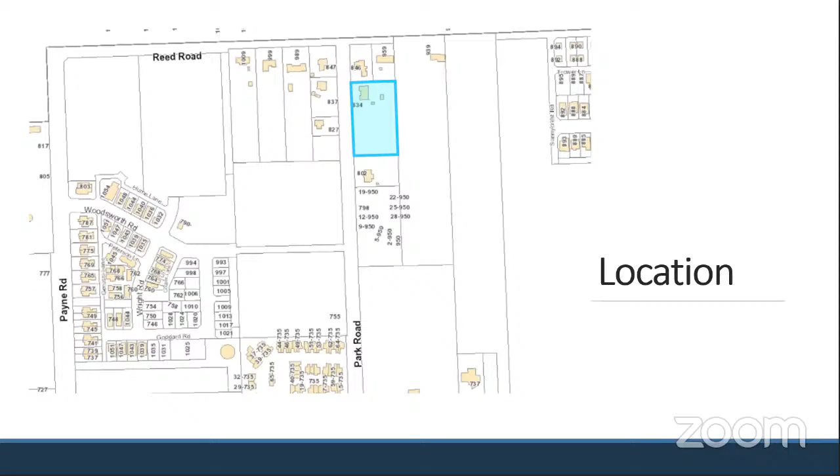A similarly sized property just to the south on Park Road, for context, is currently also under development with 28 units and using the same requested cluster residential zoning. So the application requires a change of zoning for the property from single family residential R3 to a cluster residential zone that's in line with the land use envisioned in the OCP, and also a development permit application for the form and character of the proposal, which is under intensive residential development permit area number 8. We're looking for a recommendation today on both the next steps of the zoning amendment and the form and character development permit.

Councillor D'Andrade, you and Councillor Kroll had a meeting with BC Hydro today, and Councillor Kroll and I had one with the RCMP earlier today as well. And Mark sat in on that, along with Nicholas Simons was in the background. Yeah, so it was good.

And we'll of course brief council at the appropriate time on those meetings and results, but it was a good conversation. I plan to attend that policing one and then realize that it was the same time as back to school start today. That's right, exactly. Yeah, so you went to school instead? I went to school instead, yeah. That's good. Councillor D'Andrade, your lips are moving, but I'm not hearing anything.

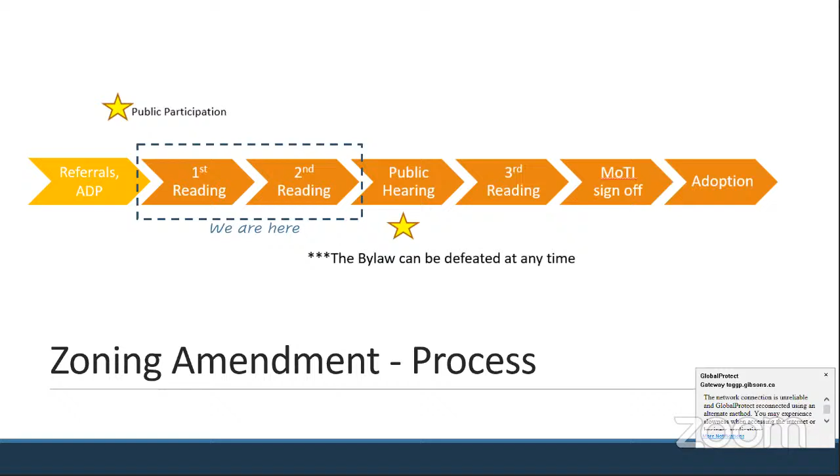The process for the form and character development permit, by contrast, is shorter. We've referred the application to agencies as well as the ADP for comment, and these are included in the report. Some revisions have been made preemptively in response to the ADP's comments, which will be shared with council for a decision following the public hearing on the zoning amendment. So today we're just looking for preliminary comments, with a decision to follow the public hearing.

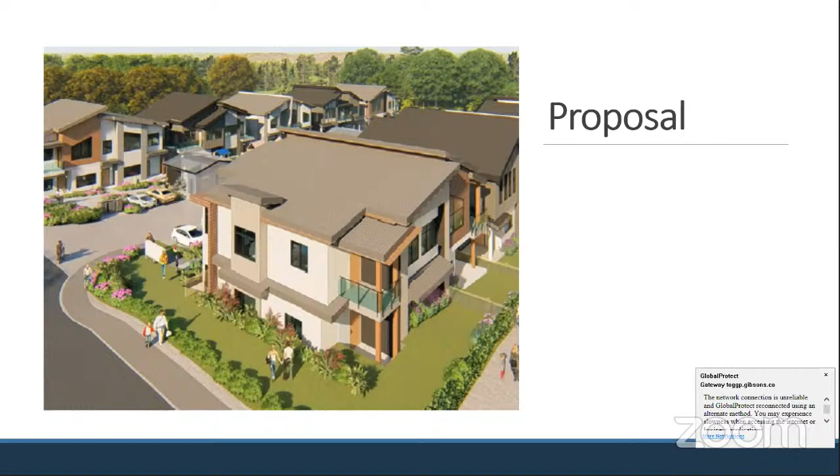As described in the plans attached to the report, the proposal is for 28 ground-oriented units within 10 buildings. 8 of the buildings have 3 units and 2 are duplexes, and unit sizes range from 1 to 3 bedrooms.

A change of zone is to be consistent with the vision for the property as described in the OCP. Like much of the properties within the Upper Gibsons neighborhood plan, the OCP designates 834 Park Road for development under the land use designation of low density residential 2. The intent of this designation is to permit small lot single detached dwellings, duplexes, cluster housing, townhouses, and multi-unit housing in a single detached building form, with an FSR of 0.75 to a maximum FSR of 0.9, generally 25 to 40 units per hectare.

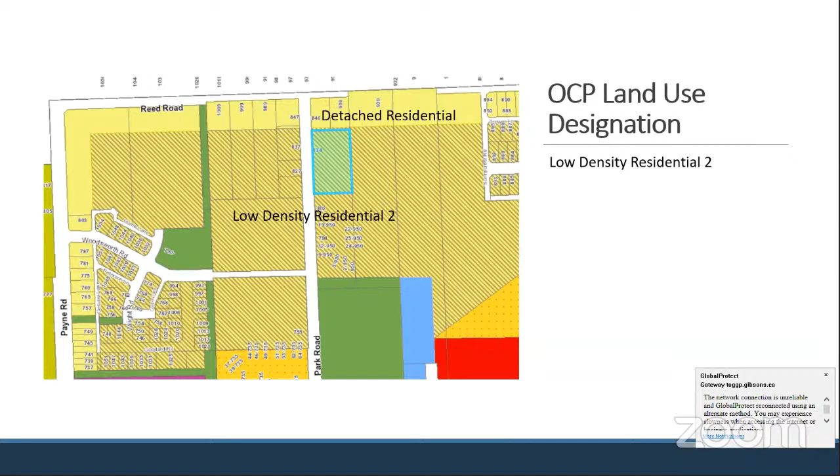The intent for land use in the Upper Gibsons neighborhood plan area is further described in policy 9.2.4, with the intent to encourage a range of ground-oriented housing types, including small lot single detached houses, semi-detached houses, duplexes, cluster housing, townhouses, fee simple row housing, multi-unit development in a single detached form, and garden suites.

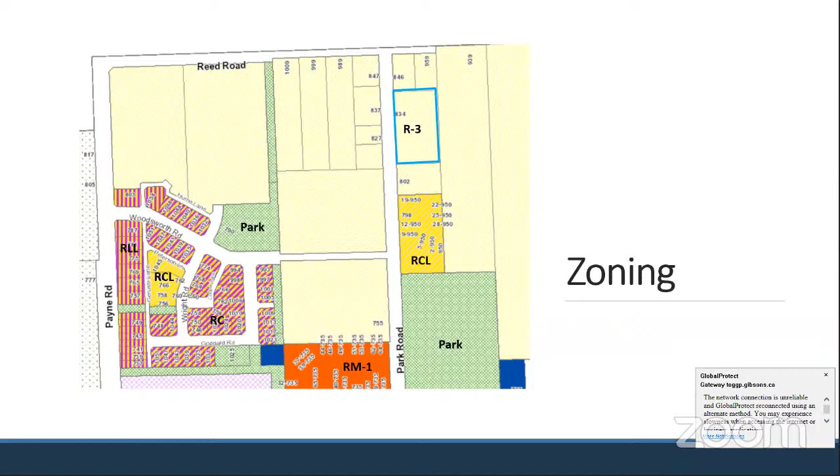The current zoning of the property and surrounding properties is single family and 2-family residential 3. The proposed zoning amendment would change the zoning from single family R3 to the RCL cluster zone, which was designed for use in the Upper Gibsons neighborhood area and has previously been applied in Parkland and on the property to the south on Park Road.

In line with the intent of the OCP's low density residential 2 land use designation, the allowed uses would be expanded to include duplexes, apartments, and townhouses, in addition to the single family residential use already permitted. It is the intent of the designation that the dwellings have a form that fits well within a single detached residential neighborhood context.

As discussed in the report, the zoning amendment includes a recommendation to remove the requirement that the upper story of the buildings have a net floor area of no more than 80% of the lower floor area. The intent of this regulation was to limit upper story massing. However, in practice it's shown to be problematic to implement, and it's also redundant given its intent overlaps with the form and character guidelines.

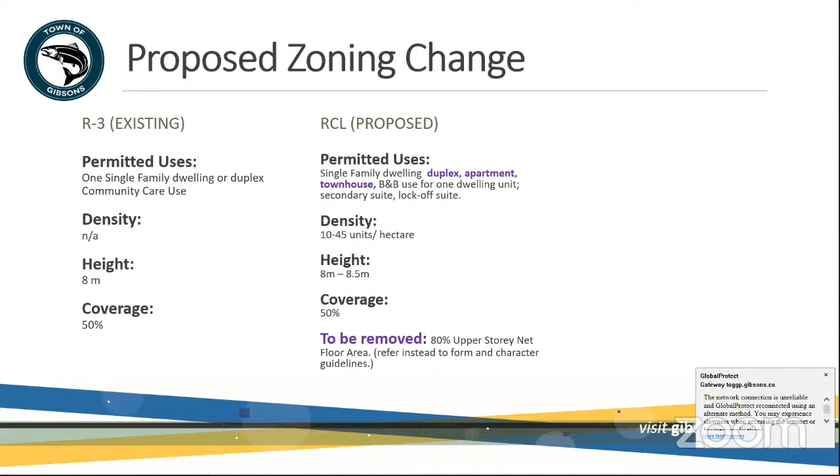As part of a zoning amendment application that increases the density for the property, the applicant has provided a letter outlining proposed community amenity contribution. The letter is attached to the report and proposes a cash contribution calculated based on the terms of the town's most recent draft CAC policy.

This was provided to the applicants as the best guidance we could offer at this point. The offer includes a provision of $112,000 with credit for the existing use permitted on the lot, and with further credit to be valued for the contribution of a public trail easement, provided in kind at the south end of the property.

Meanwhile, the applicant is also looking into the potential of securing affordable housing units through a partnership with BC Housing, and so intends that should an in-kind contribution of affordable housing units be feasible, the offer would be adjusted through a future request to council.

The total value of the contribution, presumably to council - I guess the mechanisms need to be worked out - is to be finalized prior to the adoption of the bylaw amendment.

The plans attached to this report were reviewed by staff and have been shared with the advisory design panel for comment in relation to the development permit area guidelines.

Following the report, in response to the panel's comments, the applicants have revised the plan in some minor ways to include pedestrian connections from the units to Park Road and to show more detailed renderings of the garages on the lane. The images I will share here are the revised renderings.

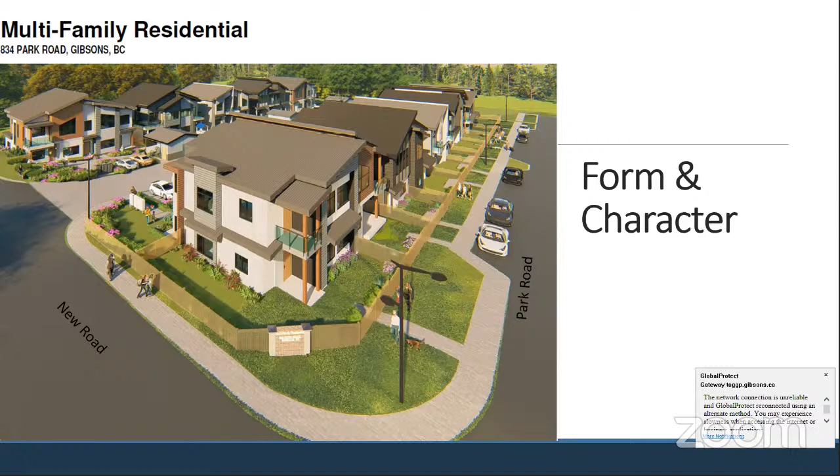The units vary in their designs with 5 floor plans repeated once each in the development and adapted to the location of each dwelling on the property. The massing of each cluster is broken visually with variation in roof lines and the use of architectural and finishing details. Front entrances are oriented to the central lane,

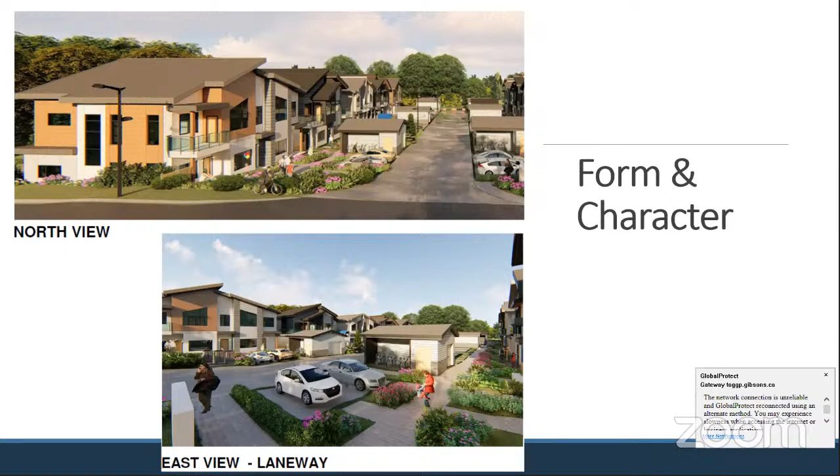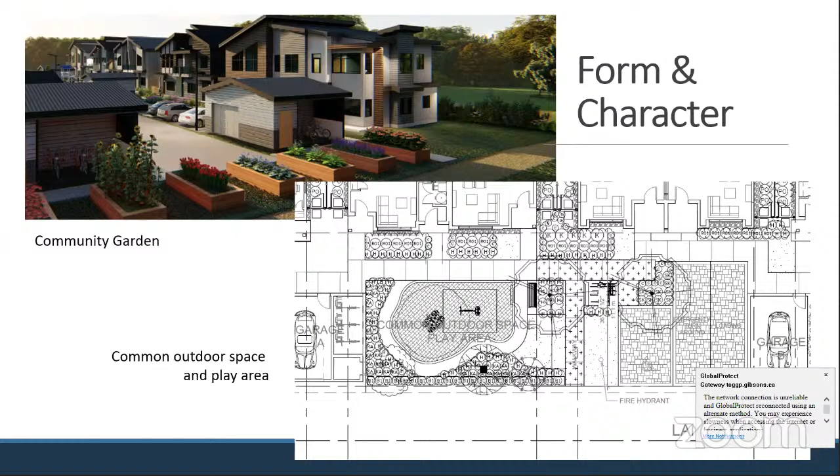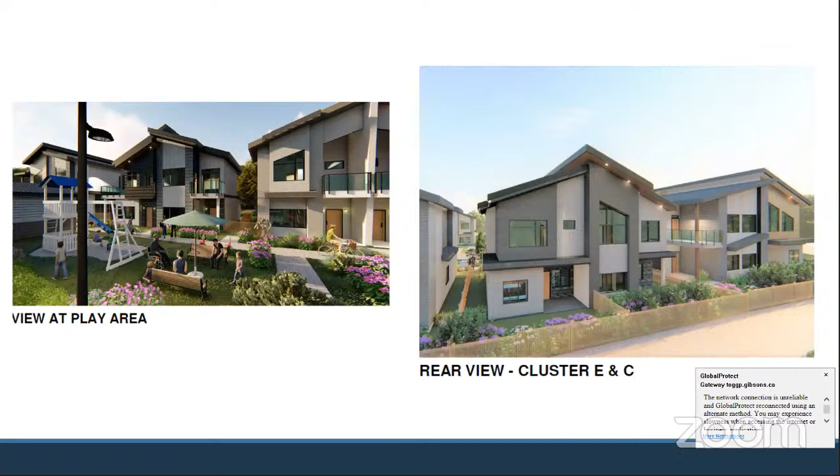At right, a view illustrating the planned lighting on the buildings, which is tucked under the awnings and within the porches and balconies.

The landscape plan attached to the report is too large to show here in full detail, but details significant tree and shrub plantings, which provide distinction between public and private outdoor spaces and soften the appearance of buildings and parking areas. Plantings buffer the driveway and parking areas, define public spaces from private spaces, and soften the appearance of the buildings in the local and neighborhood context.

Plantings at the top of the plan, shown here, provide a transition to the undeveloped neighboring properties to the east. Overall, staff finds that the form and character guidelines of DPA 8 are well considered by the proposal and well addressed.

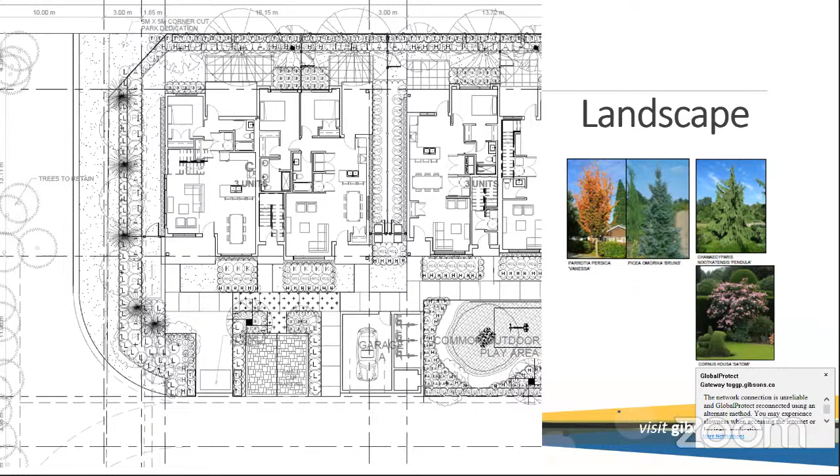So the advisory design panel reviewed the form and character of the project at its meeting on August 25th, as well as the zoning amendment request. And the panel was generally supportive of both the proposed zoning amendment and the form and character.

The recommendations of the panel included retaining mature trees where possible on the southern right-of-way and on the Park Road frontage, and adding pedestrian connections to the building frontages on Park Road. The applicant has since revised the plans to include these and to provide better renderings of the garages for council's consideration, shown here. They were unfinished in the previous version of the renderings.

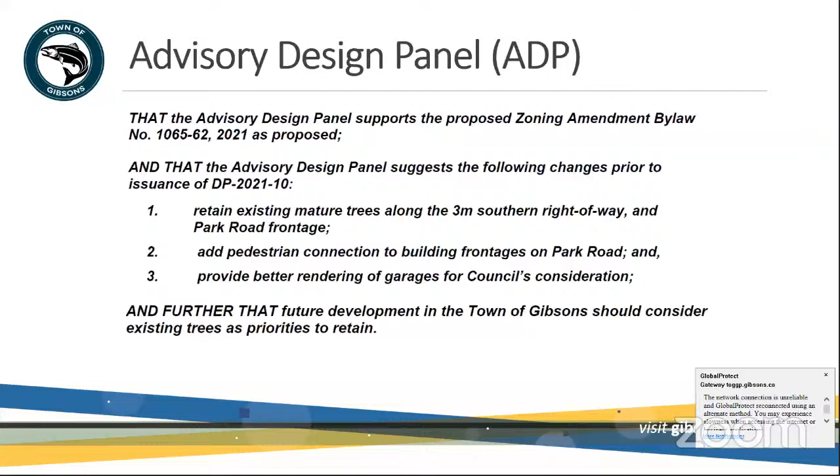The ADP also provided a recommendation reflecting concern about the quality of the tree survey provided for the proposal. Part of this concern related to trees at the south of the lot that a member understood to be on the property and not included in the plan. The applicant has since followed up to clarify that the survey showed the trees to in fact be off-site, and also that retaining the trees would benefit the project, so there was no intention that they be removed. If they are found to be on the lot, they would hope to keep them.

Staff's recommendations are listed on page 1 of the report as copied here. In summary, the zoning amendment receive first and second readings, a public hearing should be scheduled, and the committee should provide preliminary comments on the form and character. I'll turn the screen back to you for discussion, but please note that we have the property owner Alex Sayin and project architects Lynn Ramos and Rosa Salcido available to answer any questions you might have. Thank you.

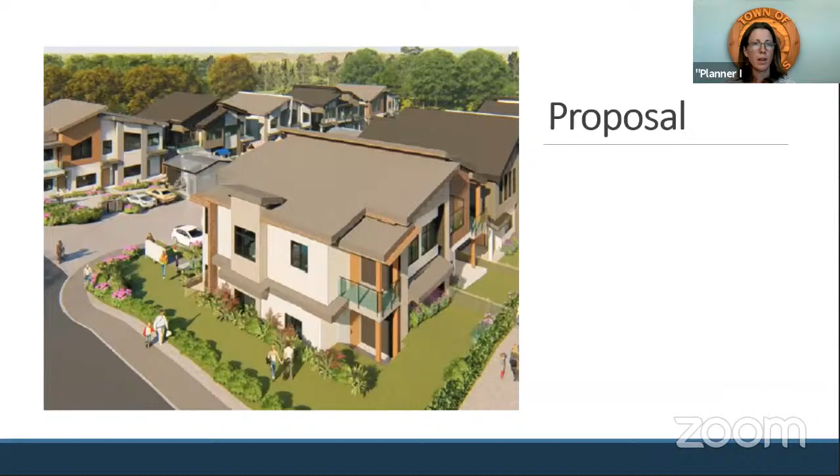So you're looking over here. This is a confusing image because this is Reed Road right here, only shown in half. So we have Reed Road, Park Road - this doesn't exist yet. These are some undeveloped properties. We have the subject property right here, and there are three or more undeveloped properties in here. It would be connected at the point those are developed and rezoned, and would connect through the top along Reed Road to Aurora and that subdivision up at that end.

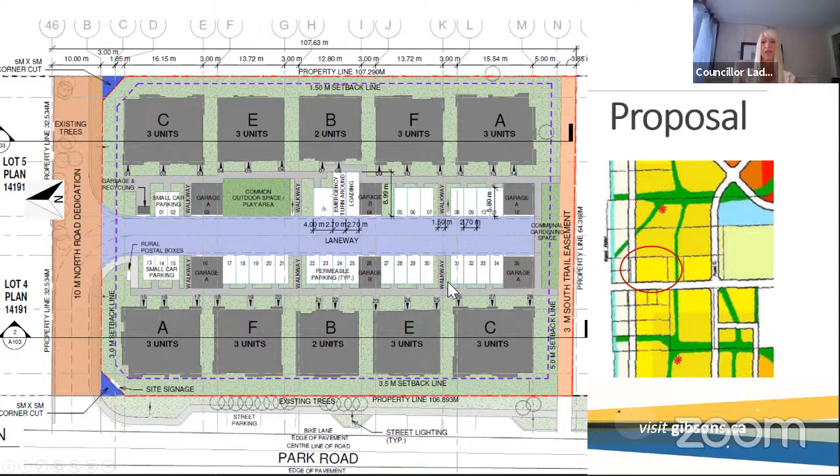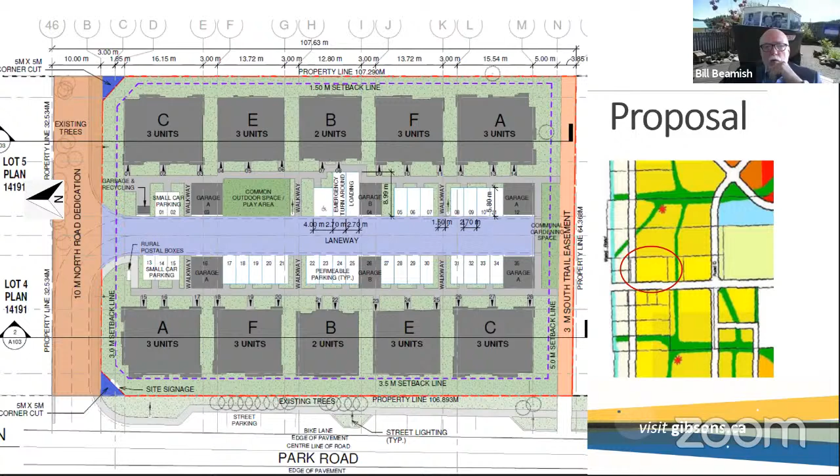Okay, thank you. Looking at that though, where are we going west from Park Road? It appears it's going to go through the Parkland subdivision, is that correct? Yes, there are two exits to be developed from the Parkland subdivision, and I'm assuming - I haven't looked at how this one relates to that one recently - but I assume those are going to be connected. Okay interesting, I didn't think there was going to be another exit from Parkland at that point. I thought it was going to be over to Park Road by Woodsworth. That's interesting, thank you. I hope I'm correct in saying that.

Okay, thank you for that. Other questions, councillors? Concerns? Councillor Croal, I'll go to you first.

Thank you. I was at the committee meeting when this was presented, and I like the idea of cluster housing, being able to hopefully bring more affordable housing into the marketplace. I'm only saying this as a concern coming into the project.

It seems like there's a bit of homage to the vehicle. You come in the lane into the project, and it's parking stalls and garages with a small spot of a community play area for children, and it's obviously aimed at that.

I'm just curious from a developer's point of view, and this would be a question probably for Rosa and Lynn. What would this do to the cost of your project to consider underground parking? To be able to make a nice, attractive laneway into the project with a couple of visitor parking stalls, the 28 residences would have underground secure parking. This is something I would have liked to have seen addressed at our other meeting, but it didn't really come up fully.

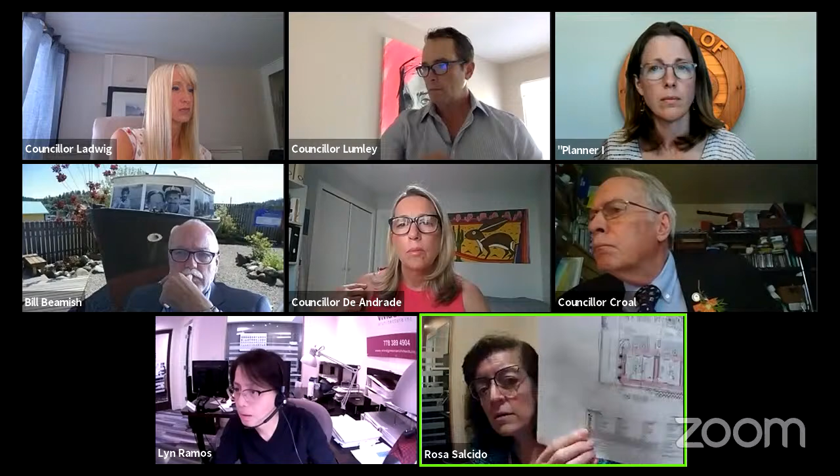Who has that? Kirsten, is that a question for me? Honestly, I have seen the landscape plan and it includes a significant number of trees. I haven't counted them or recall the exact number, but there are significant numbers in the front and rear of each building, on the sides, and buffering the property within the boulevard and entrance. They're shown with circles with a dot in the middle on the landscape plan. Sorry, I don't have a number, but there is a tree schedule counting them. However, it includes some bushes. The tall trees in front total more than 100, but some of those counted are lower bushes.

Okay, I wasn't sure, because sometimes we can take compensation for 90 trees but plant them elsewhere. I just want to make sure they would be in the area. And going back to my question about breeze or air circulation, is this being addressed? It's a preoccupation I have for the future, maybe not too much in the next 5 years, but it could be drastic in the next 20 years, in certain places becoming almost unbearable. I know we're still not too populated, so there's a lot of air circulation, but understanding climate change and how it's impacting things, is a study being considered when developing this cluster type of housing, which I appreciate? I don't want to just criticize, I think the project is really beautiful, and like Councillor Ledwig mentioned, but these are just concerns I have.

Sorry, is this a question for...? Yeah, it's a question of whether air circulation is being taken into consideration. Because with single family homes, you probably don't need to do too much study, especially since they're not tall buildings and the massing is smaller. But when you start compacting, you're going to have a circulation effect. Obviously the trees, when they grow, will minimize that—they can cool up to 5 degrees, which helps. But I'm just asking if there's consideration for air circulation, because we will be experiencing heat waves.

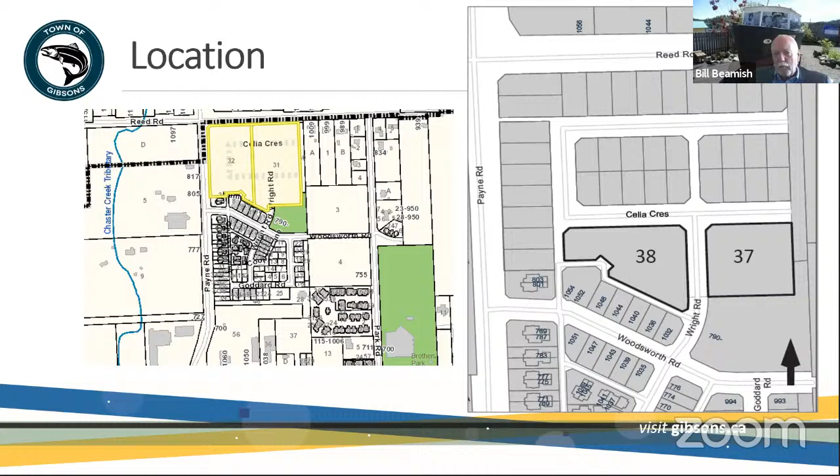And I realize we're not talking about this particular project here, and everybody, I hope, understands that. We're talking about the one that we just sent to public hearing, but there is that opportunity, and I won't be here for the public hearing. So, okay, sorry Director, we are just looking at two things in proximity. Thank you. Yeah, no worries.

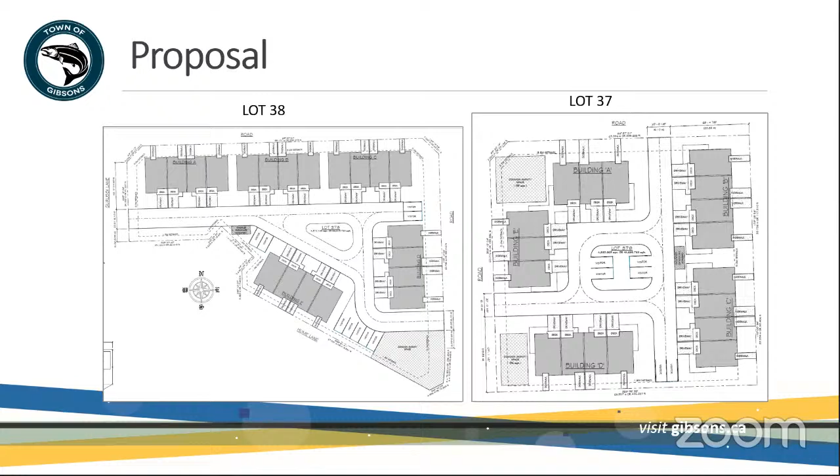Okay, so here's a map of the proposal. Lot 38 has 5 4-unit townhouses on it, and lot 37 has a mix of 2 3-unit buildings and 3 4-unit buildings. They all have this central courtyard design. So there's 10 new buildings in total, 8 with 4 units, 2 with 3 units, and a total of 38 new residential units. 1 triplex will be retained by the developer on lot 37 as purpose-built rental units, and 1 fourplex will be retained on lot 38 for purpose-built rental.

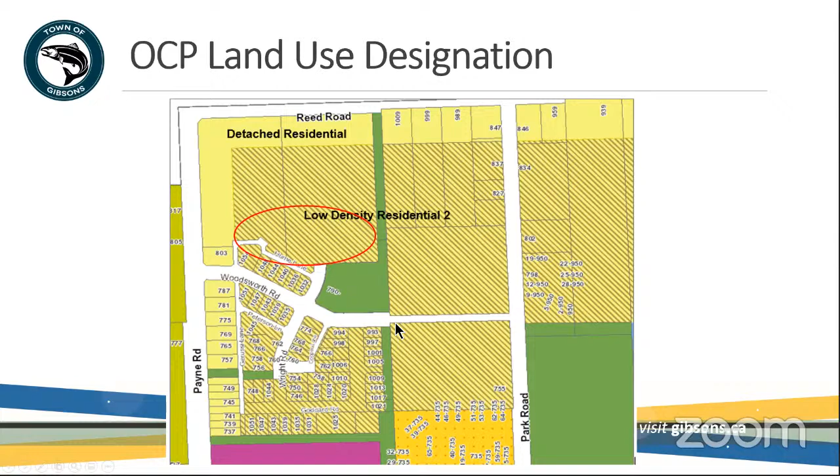The land use designation designates the land as low density residential 2, shown here in this hatched diagonal area. That designation is intended to permit small lot single detached dwellings, duplexes, cluster housing, townhouses, and multi-unit housing in a single detached building form with a floor space ratio of 0.75 to a maximum of 0.9, generally 25 to 40 units per hectare. There is a policy in the OCP for this designation that encourages ground-oriented housing, and it also speaks to duplexes, cluster housing, and townhouses.

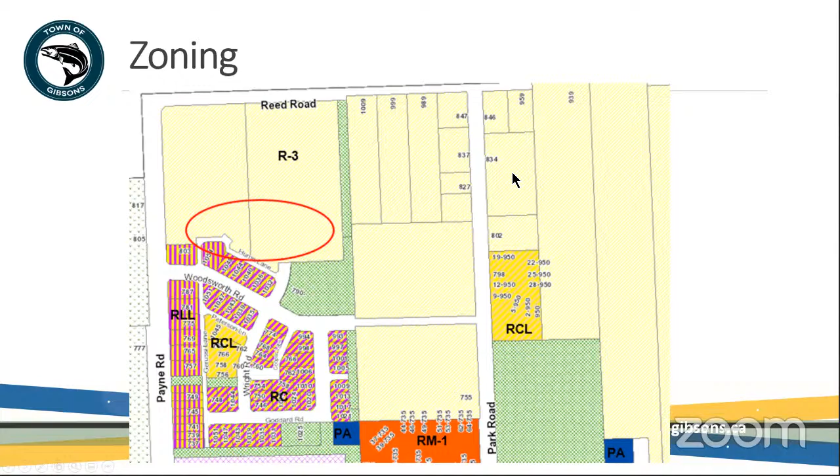So the zoning designation is consistent with the OCP land use designation. Right now, all these properties in yellow are currently designated R3, and the proposal is to rezone them to this RCL zone. There are spots of it, and 837 -- or I think it's 837 -- is the one that's also being rezoned on the other side. Sorry, it's 834. Sorry, it's been a month.

Okay, so the proposed zoning change: existing would be R3, so single family duplex, density 1 to 2 units per property, 8-meter height, 50% lot coverage, to the RCL, which now allows the townhouse unit. The density is increasing to 45 units per hectare. The height remains similar depending on the slope of the roof, and the lot coverage is still the same. What's also being removed in this zoning amendment is that 80% upper story net floor area, as that's been really challenging to implement, and it's more of a form and character consideration. So essentially, the zoning amendment is to increase the density.

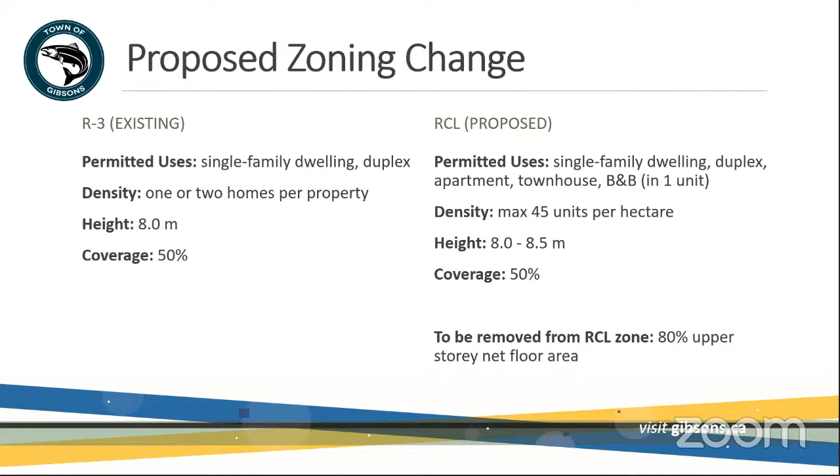For the CAC contribution, again, we shared the draft policy with the developer, and what they are proposing is that of the 38 units, they will retain 7 units as market rental, and they've provided a $4,000 contribution for 31 units, which comes out to $124,000. So that is consistent with the draft policy at this point.

The next 10 slides are images that show the form and character for the committee's preliminary comments, although the form and character development permit cannot be issued until the zoning allows the use.

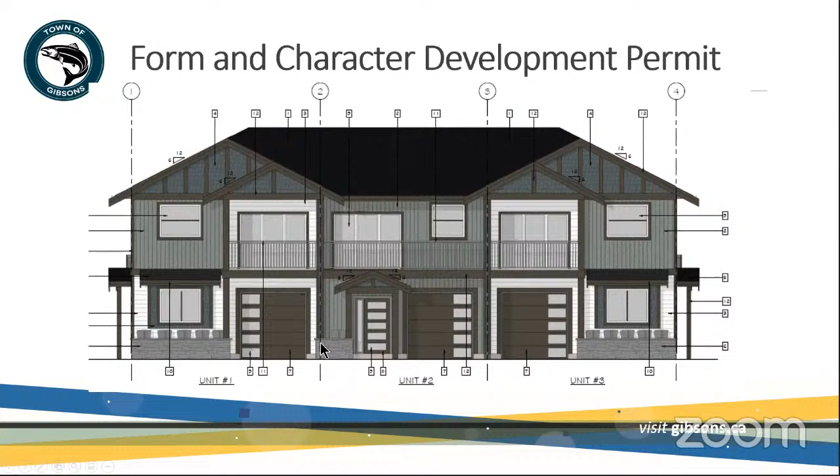Here's an image of lot 37 of the 3-unit townhouse, showing units 1, 2, and 3. This shows the access from the interior courtyard, with gray vertical board and batten, white horizontal Hardie board, blue Hardie shakes, gray stone, a black roof, and gray trim and garages. Sorry, I was pointing at the wrong screen. So there's 1 unit, the 2nd unit in the middle, and the 3rd unit on the end.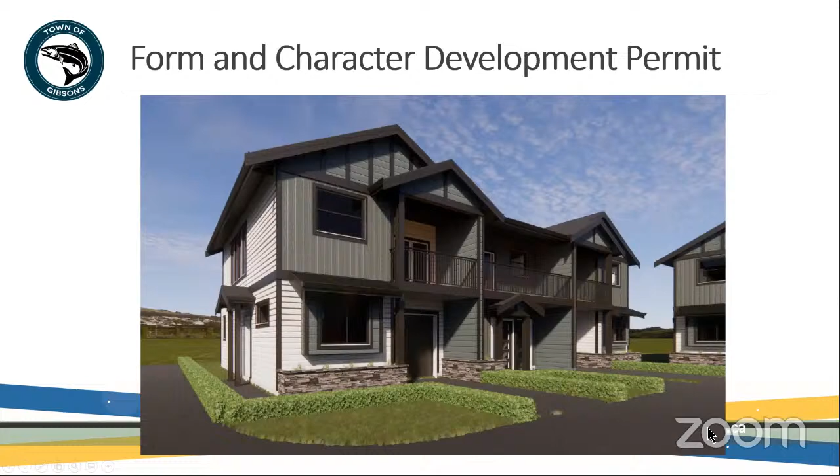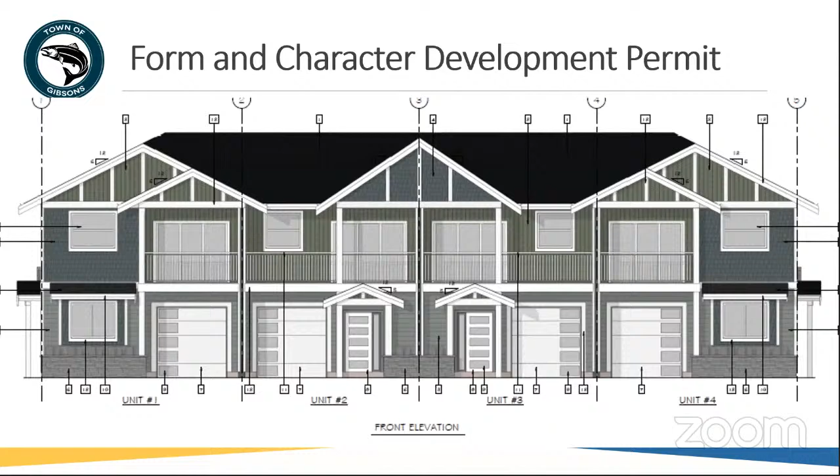This is the 4-unit townhouse. Here's unit 1, unit 2, unit 3, and unit 4. This is the view of the front elevation from the interior courtyard, showing 2 main entrances. It's got a black roof, moonlight moss green board and batten, gray horizontal Hardie board, midnight surf blue Hardie shakes with white trim and white garage doors.

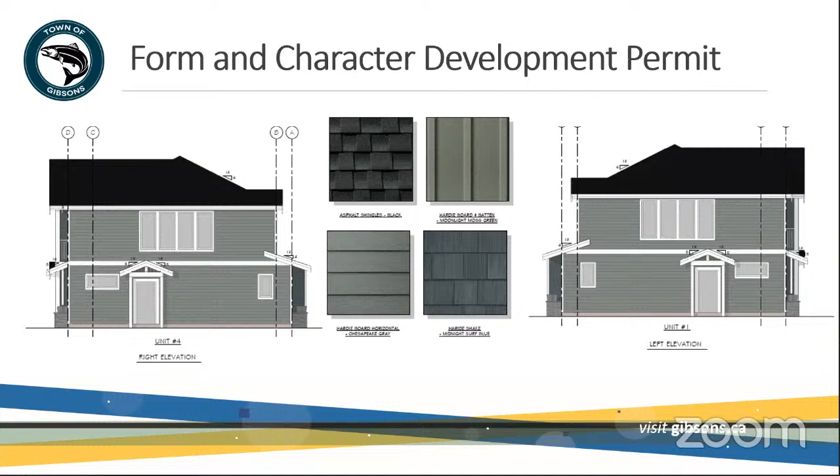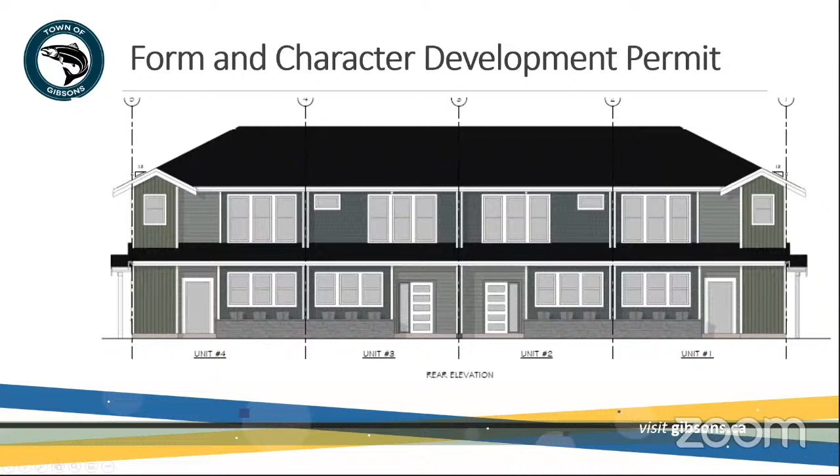This shows the side elevations and the color palettes, which are the grays and greens with white trim. This is the view from the public street, with a door fronting the public street for pedestrian access and orientation. And this is a rendering of the 4-unit townhouse from the interior courtyard.

From staff's analysis and evaluation against the form and character guidelines, staff considers that this proposal fits with the character of the neighborhood in the Parkland subdivision, and the design provides for high quality livable forms of housing in a walkable neighborhood. With 7 units retained by the developer for rental housing, these units will provide residents with high quality rental housing options.

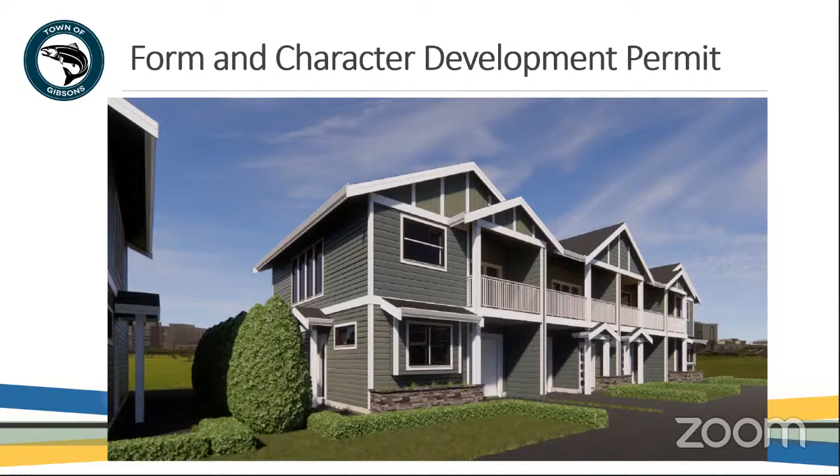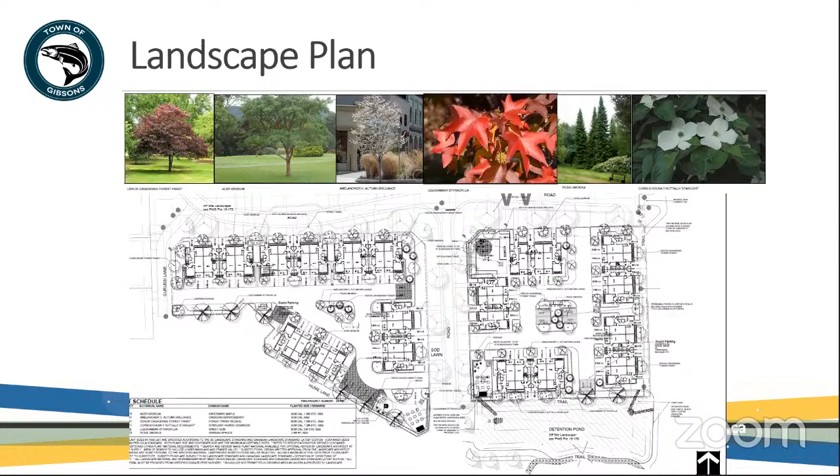This is a proposed detailed landscape plan. It's probably hard to see on your screens since you have to zoom in, but it provides a mix and variety of trees, shrubs, grasses, and perennials. It shows the number of trees being proposed and planted, along with shrubs, grasses, and perennials. In terms of trees, there's the paperbark maple, Canadian serviceberry, forest pansy redbud, hybrid dogwood, sweet gum, and spruce trees, among a number of others.

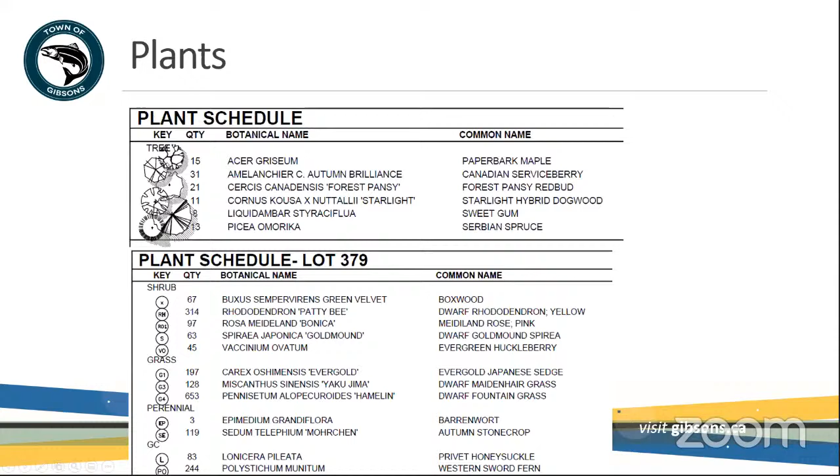In terms of referrals, they were sent to several agencies. The Squamish have not provided comments at this point. The advisory design panel supports the zoning amendment, and suggested some changes to the development permit prior to issuance: reduce the massing of the roof, use skylights, mute the visual party wall lines using a different level of filigree such as a softer wood panel to make the building look more cohesive, add some color to help differentiate the units, and change the landscaping toward the side doors to improve pedestrian access and circulation, such as using trellises. These have not been implemented in the plans yet.

It's just going to committee, and if you have any comments we can bring those back to the developer. In terms of the fire department, fire code requirements would have to be met at the time of building permit issuance, including fire access, firewalls, and that kind of thing.

The Ministry of Transportation granted preliminary approval. Vancouver Coastal Health had no concerns. The Finance Department commented that increased density will result in an overall increase of taxable residential assessment value, and the increased assessment-based taxes, parcel taxes, and utility user fees will be applied accordingly. Infrastructure requested driveway locations in relation to the approved civil design drawing, so we'll need more details to come up with the civil plan. The building department had no concerns. These are all detailed in the staff report as well.

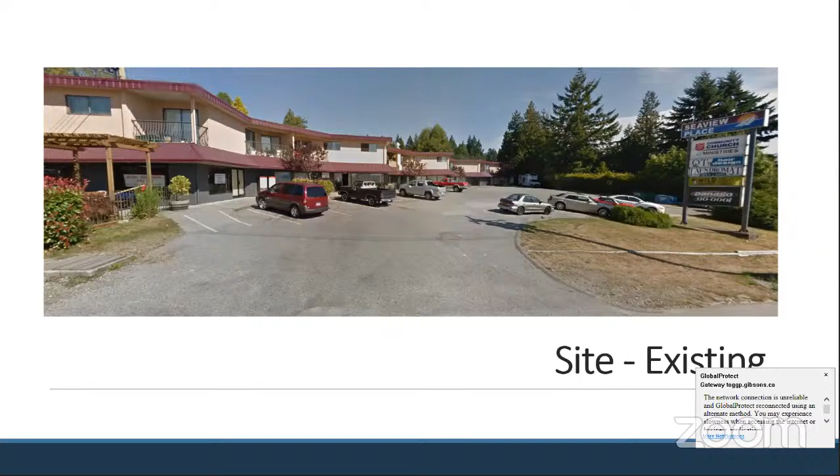This is a Google view, slightly out of date, showing the site and existing buildings as seen from Gibsons Way. The current commercial tenants of the site include the Friendly Thai Restaurant, Panago Pizza, Laundromat, Hair Salon, and the Salvation Army. The development application is for the addition of a new 3-story building to be located within the current paved parking area.

That's fronting Gibsons Way at the southeast corner of the lot. The lower story is proposed to have a single 160 square meter commercial unit fronting Gibsons Way with ground level parking behind, and 10 residential apartments located above on the second and third floors.

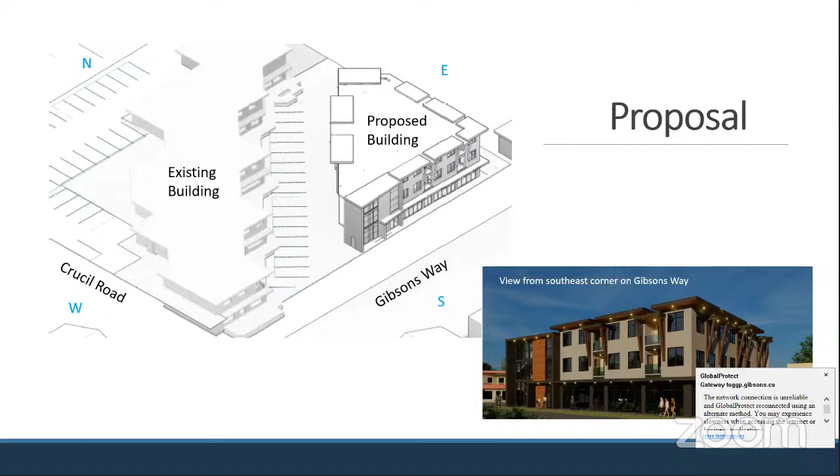It's the intention of the developer at this point that the apartments would be rental apartments. As you can see in the ground floor site plan and view of the rear of the building, 6 parking spaces are located beneath the building and accessed from the center of the site. A loading bay is proposed to be accessed via a loading entrance.

Oh, apologies, we have an update. So the loading bay is actually as shown on the right. That is a revision based on ADP comments. So there's a loading bay at the top of the property next to the existing building, and the loading bay that is shown next to the new building would be replaced with landscaping.

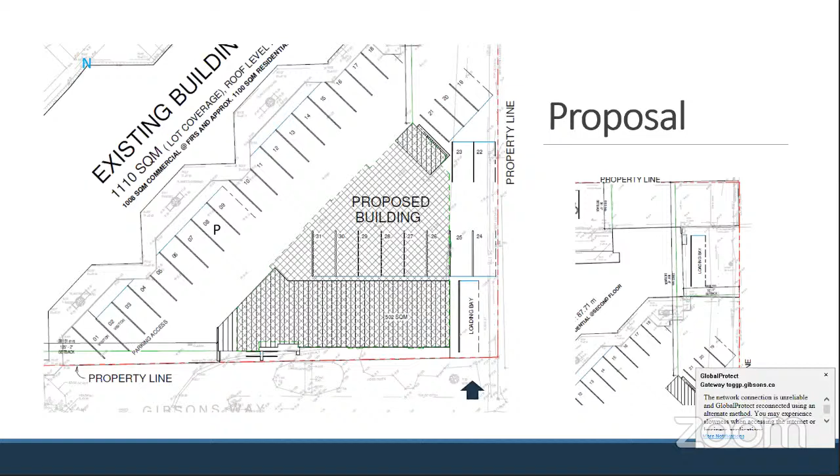The top left image here shows a view from Gibsons Way, omitting the existing swale in the frontage, which, on Gibsons Way, we have a ditch there that is fortified with boulders. Access to the building would be via a sidewalk connection that goes around the swale and connects in front of the building. So there is an access fronting Gibsons Way, but not directly accessed across the ditch.

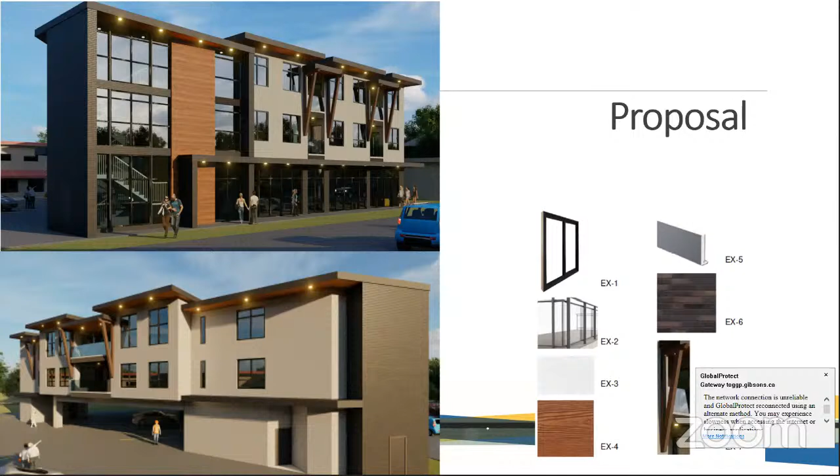We won't be filling in the ditch as proposed. The lower image shows, or sorry, they're not proposing filling in the ditch. I should be clear about that. The lower image shows the rear of the building facing the parking area and the existing building on the site, with access to the ground floor parking around the building. There is a proposed sidewalk that is in the landscape plan, but not shown in the rendering.

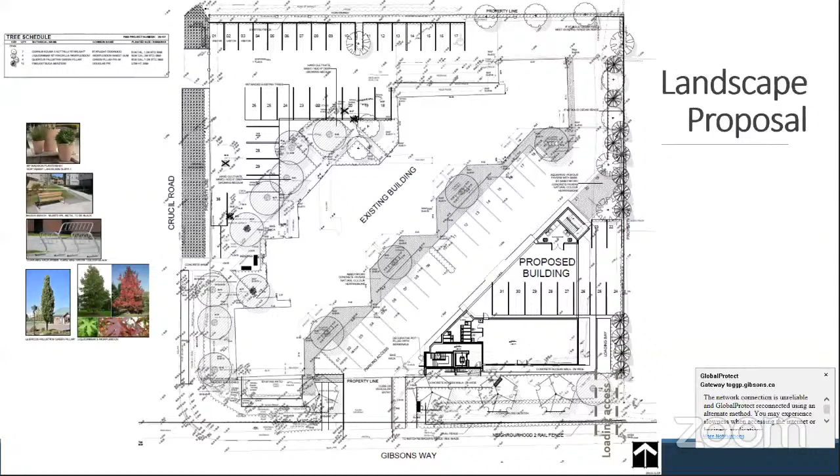Landscape improvements as attached to the report are focused on improvements to Gibsons Way and the Crucil Road frontages, and better buffering and screening of the existing parking areas. As you might be familiar, right now a lot of the frontage is not well defined and includes just a gravel expanse where people park as they wish. So this would look to define the corner better and improve that situation.

The zoning for the property is C6, which is special commercial. It's very similar to the C1 zone, which is used widely in the Upper Gibsons commercial area. Its permitted uses include commercial uses and residential apartments located above the ground floor. The maximum permitted height for the zone is 10.5 meters, which is somewhat lower than the 12 meters permitted in the C1 zone.

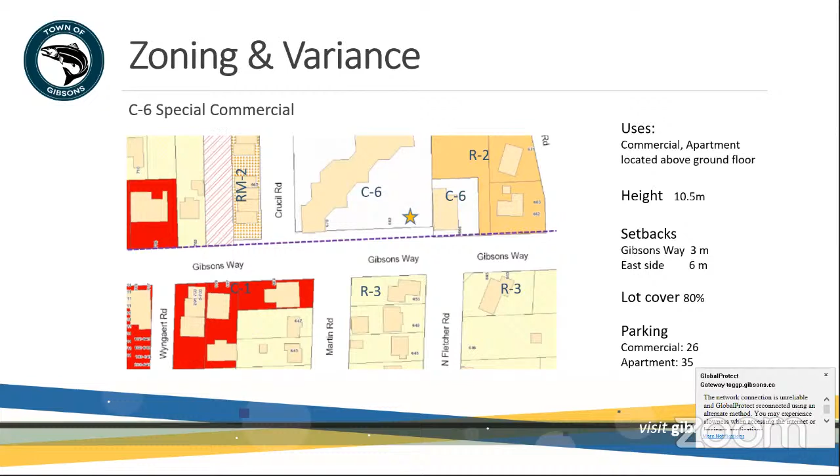The setback affecting the proposed building location includes a requirement for a 3-meter setback from the property line on Gibsons Way and a 6-meter setback from the east side lot line. Staff's review of the proposal found that the front lot line on Gibsons Way encroaches within the required 3-meter setback, and for this reason, a variance is requested to allow the design features of the building to project close to the front lot line. As shown by the purple dashed line, the property frontage is set back by about 5 meters from the typical lot frontages on Gibsons Way. Therefore, the effective setback of the building from the street edge would still be set back 2 additional meters in relation to neighboring developments with the 0 lot line setback.

Referrals were sent to the advisory design panel for comment, as well as to the Squamish Nation, the Gibsons and District Volunteer Fire Department, the Infrastructure Services Department, and the Building Department. Those comments are provided in the plan, and there were no concerns.

Correcting myself, the fire department did point out there's a need for a 6-meter clear access on the driveway between the buildings. That was provided at ground level in the plan, but there are some projections on the building at the first story level that will need minor adjustment to ensure the fire truck can fit through properly.

The advisory design panel reviewed the application at its meeting on August 25th. The panel was in general support of the proposal and the requested variance, and provided recommendations that the development permit and the variance be issued, subject to minor changes.

The changes they requested are that a lighting plan be provided that uses full cutoff, low glare fixtures. This wasn't specified in the plan, and this was a recommendation of staff as well.

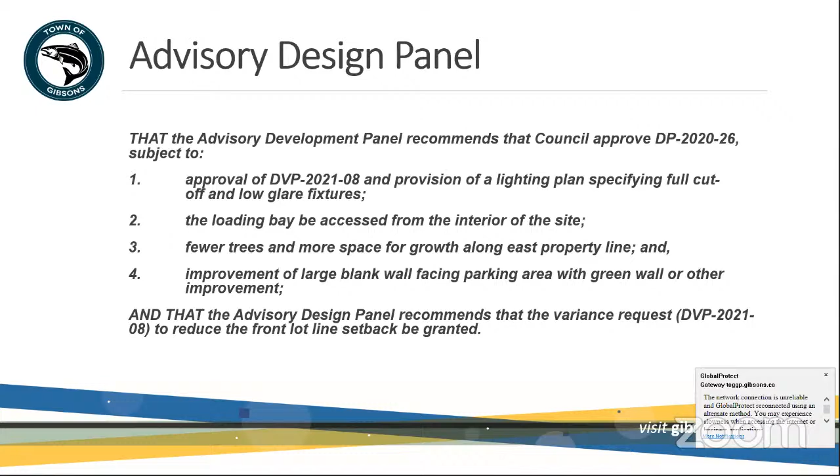Staff recommendations are on page 1 of the report and reflect the recommendations of both staff and the ADP comments. These include issuance of the form and character development permit on condition of the design changes discussed, and that notifications be sent to neighbors within 50 meters of the property for the opportunity to comment before a decision on the development variance permit is made. Finally, we ask that the recommendations of the committee be forwarded directly to council at tonight's council meeting.

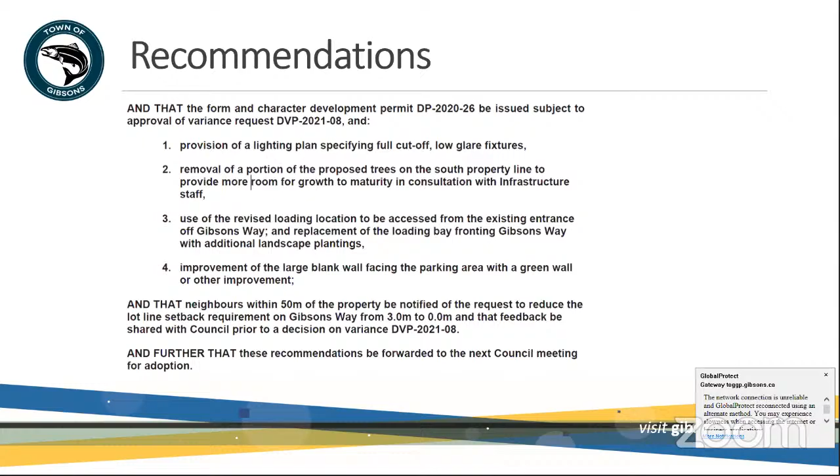Thank you. We have the applicant, if he's been able to stick around — we're expecting the applicant and project architect Farzin Yadegari to be here as a panelist to answer any questions. Thank you very much.

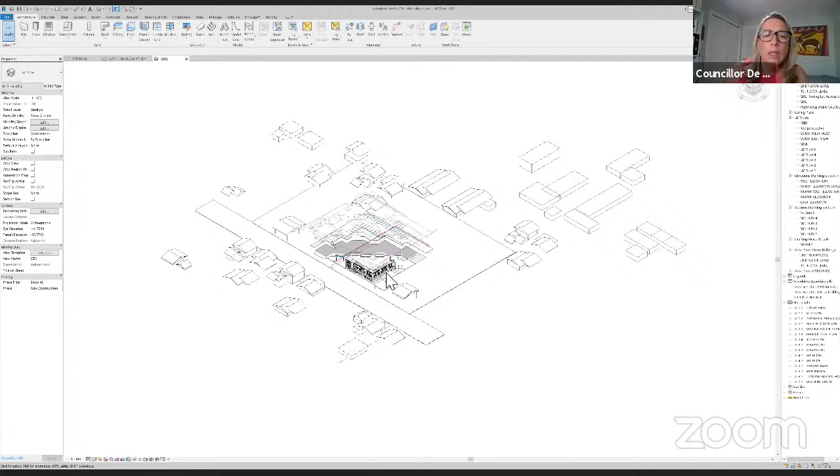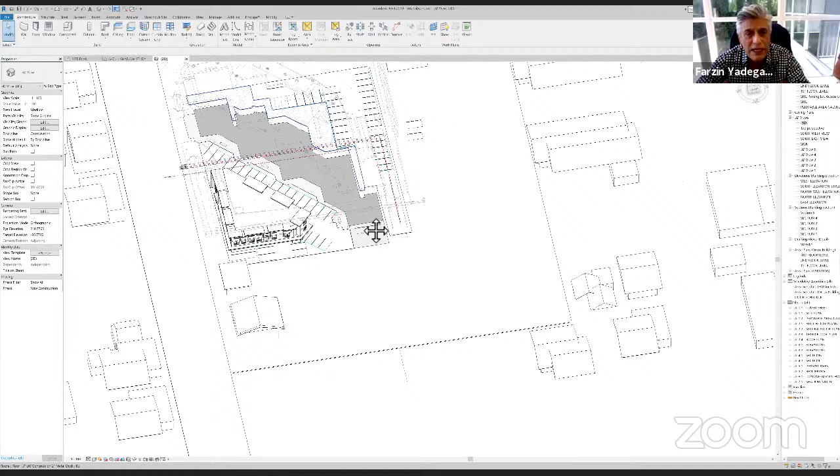Can you see it? Yes, it's black and white. Oh my God. This is relative to the buildings around. I need to mention that the height difference between the north and the south is 3.7 meters, which is more than a floor — we are not 3 meters high. So from this point to this point we have a 3.7 meter drop, about a 6% slope along here, so from here it looks like a 2-story building.

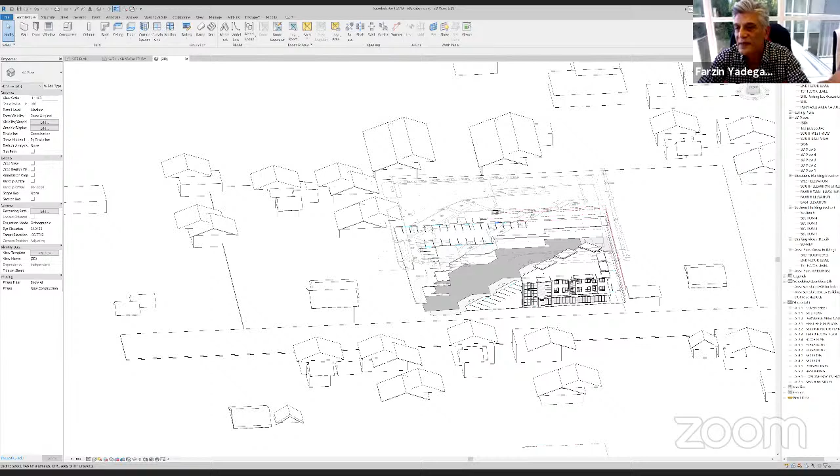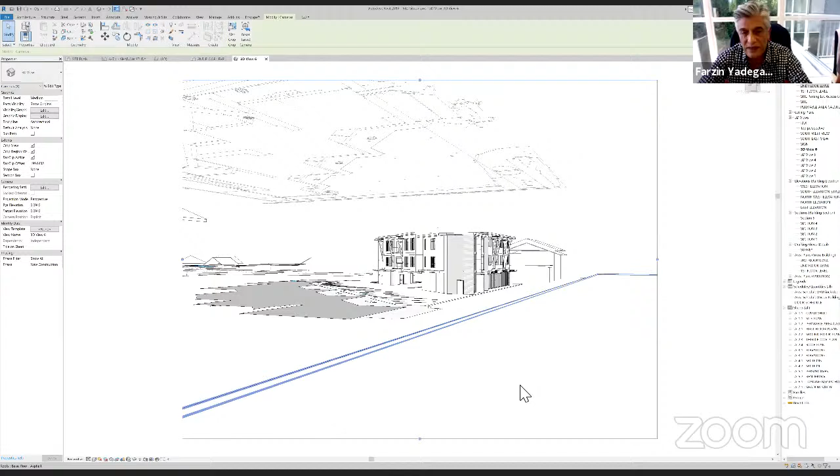I can show you — excuse me. Okay. I don't know which view you'd like to have. This is what you see. Maybe I can show you some rendering.

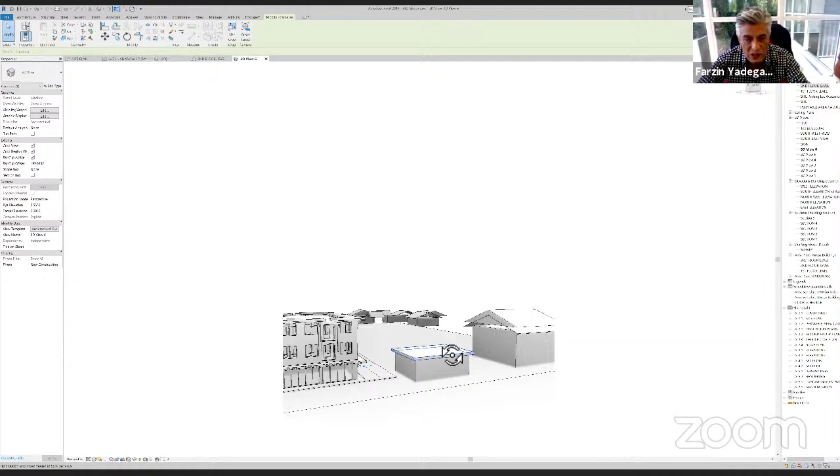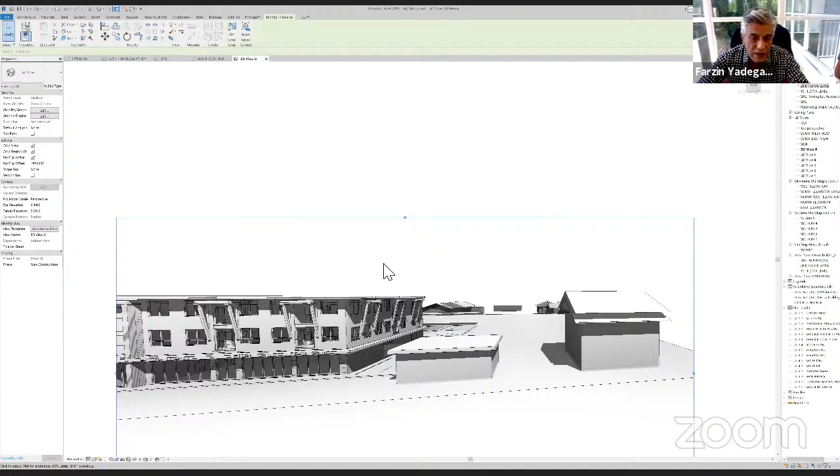I don't know if it helps, but that shows the total height relative to the building. The existing building hasn't been turned into a 3D model because it's existing, but this is it. Right? Yeah. Where is it?

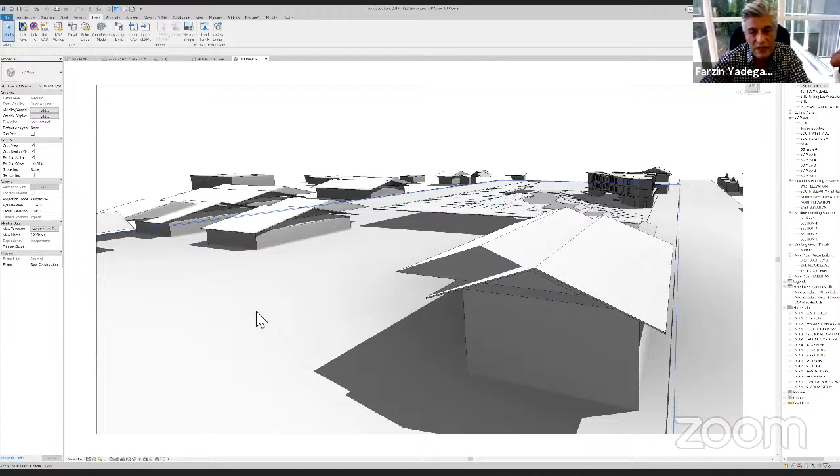No, bringing the 3D model of the existing building takes some time. So if you don't mind, any angle that you prefer to see, let me know and I will show it.

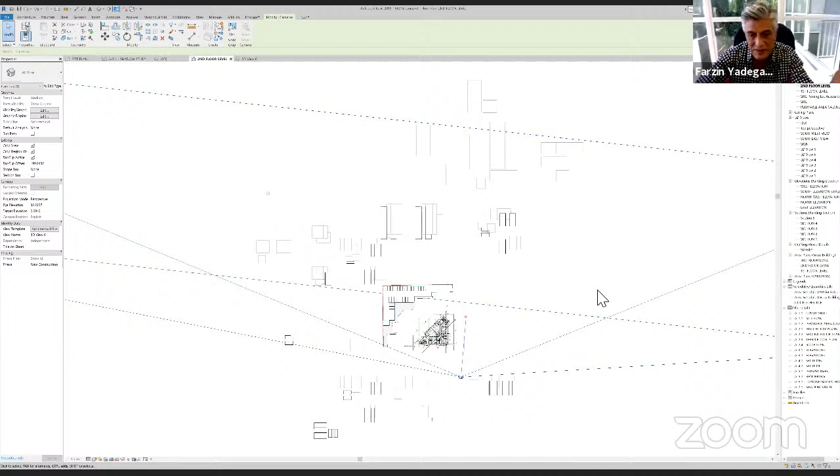Sorry, I don't know if it is any help. Yeah, Miss Deputy Mayor, I want to be close to the time. Yes, anyway. If you can go back to council's view, please, Mr. I think we are having difficulty seeing the full concept, because you're showing this building, but it's not easy to see in relationship to other buildings. Yeah, the massing is quite prominent.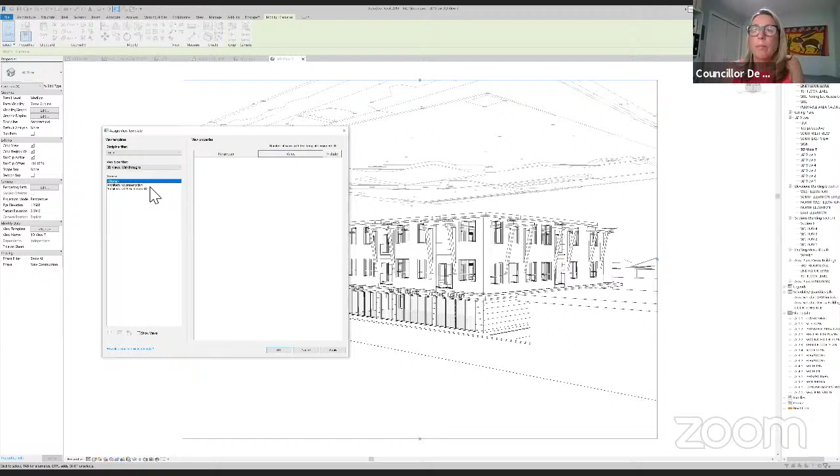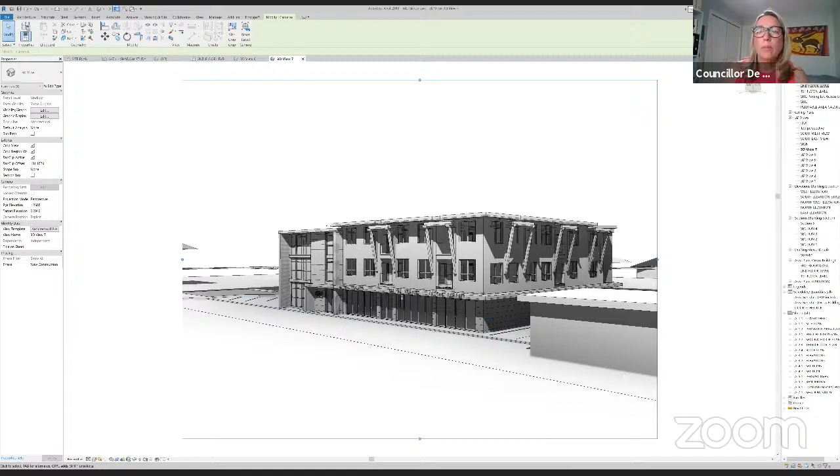Yeah, I appreciate your drawings, your 3D. Could you close your, oh, thank you very much. Just because we are running out of time, we have another meeting. So how would council like to proceed?

I particularly feel, I don't feel comfortable with the setbacks. I mean, we can just go and hear from the people. I'm not sure, I think it's a big massing. Please, planner.

Yeah, I'm very sorry to interrupt. If it's helpful, I can share the aerial photo view with the setback in relation of the buildings to neighboring buildings. Is that helpful? Well, it is helpful if it can be quick. Yes, quick please.

So this is the aerial photo view with the existing buildings shown outlined in yellow. This is the front lot line that's set back on the subject lot, and it is almost a 10 meter setback from the side of Gibsons Way. And the development I was referring to, that's a 3 meter height townhouse development, has a very similar setback.

So it's not on Crucil, it's okay. Yeah, it is actually, I think it's this project here. So I'll stop sharing unless you'd like to keep it. Okay, well that helps, I wasn't aware of that.

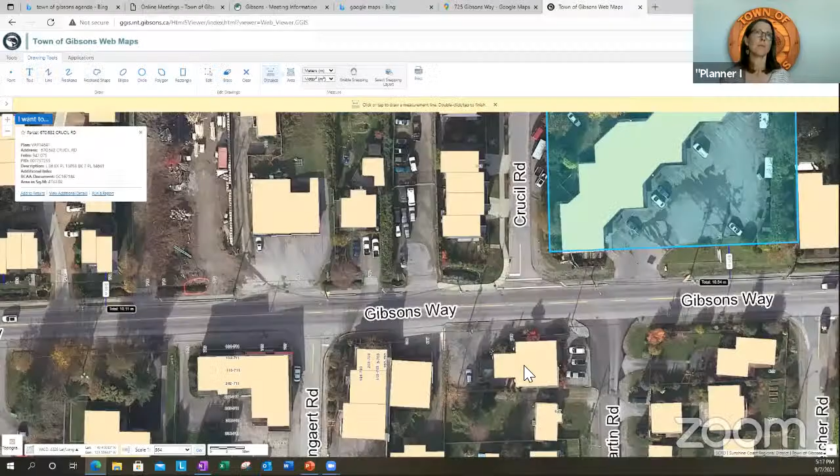Sorry, I just have to toggle that. So just so I'm clear, he's asking to build the building right up to the property line. Is that right? Yeah. And so this, sorry.

The closest point of the building would actually be the building itself, the front face would be closer to 2 meters back from the property line, but there are roof overhangs and supports, projections on the building that stick out and do reach close to 0 in points. So we would have to be very fine grained in the description if we didn't do just a 0 meter lot line. The building is also slightly angled so that it would be a bit further on the downhill side from the front lot line, and the projections on the face of the building would nearly touch the lot line on the top side.

So the walkway comes off Gibsons Way, stays within the right of way until it comes around one of the building projections on the front, and then actually comes onto the lot further to the east, and then follows the building in front of the building within the lot line.

Right, so the development of this building is in parallel with the existing building as far as its structure. Like that building is right on the property line as well. Correct? Correct, I'd say less of the building is at the property line, but yes.

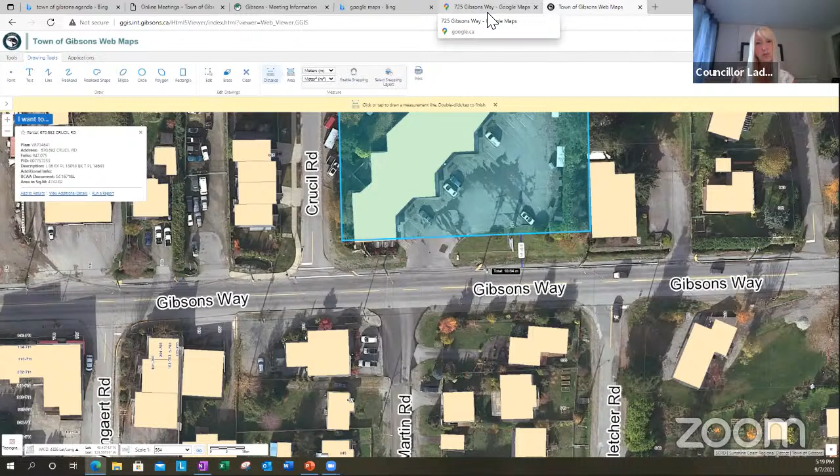Yeah, it's funny, I thought I was going to be more concerned about the variance as well, but I'm actually not, just because of the way the easement, or what is it, what is that piece of land there, that green right of way, just because there is so much space there.

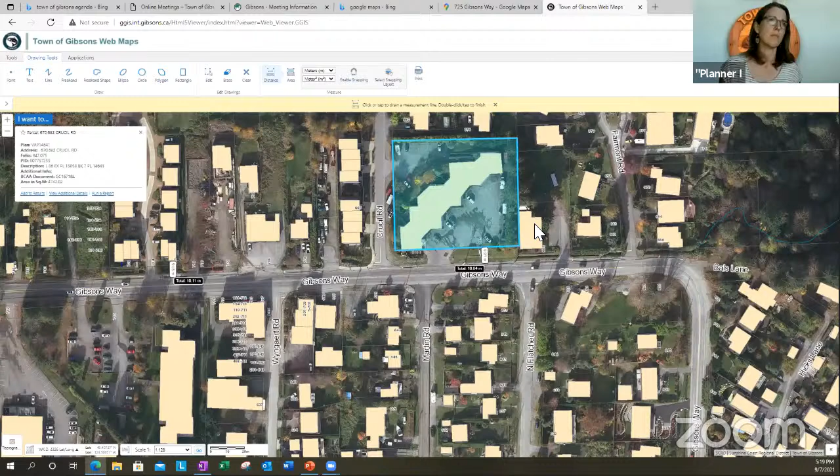And I do think that this building will sort of beautify that building, that whole block. So in some ways I'm very excited about it, and I think that it provides a lot of value in many ways. So I am quite torn on this, but like everyone has said, the massing is significant, and that does concern me.

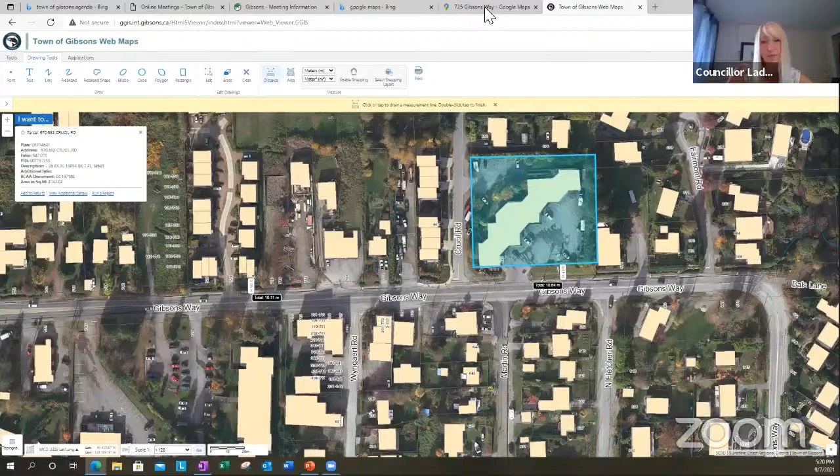I wonder if we should move this, and maybe could we approve it for first and second reading and see kind of what the community's comments are, ease into this? Is that a possibility? Instead of taking it right to adoption, could we?

This is not a rezoning application, it's just a DP for form and character and a variance. The variance process involves notifying neighbors and receiving submissions, then council makes a decision. Form and character is based on guidelines, so there's no provision to ask for an upgrade package from a different building's DP. It's based on the criteria. The council could deny the variance up front, or at this point just notify neighbors, solicit feedback, and come back for a decision.

Councilor Ladwig, do you want to finish? I was going to say I'll move it. I'm curious to see what the community has to say. Okay, we have a second.

I'd like to raise a point. One concern Councilor Croal brought up was circulation. Right now the setback doesn't look like a big wall, perhaps. I would prefer a more realistic 3D rendering, not just lines, so we can really see the building mass and its relationship to surroundings. It's a little challenging to see. How can we address the concern of circulation, since it is a big block? It might not impact views too much, but it could impact air circulation. Suddenly you have a big mass in front of a block. If the building were townhouses, there would be more space. With the exception of the building behind in the parking lot, which is low, most developments on this side of the road seem to be houses with space between them. Am I correct?